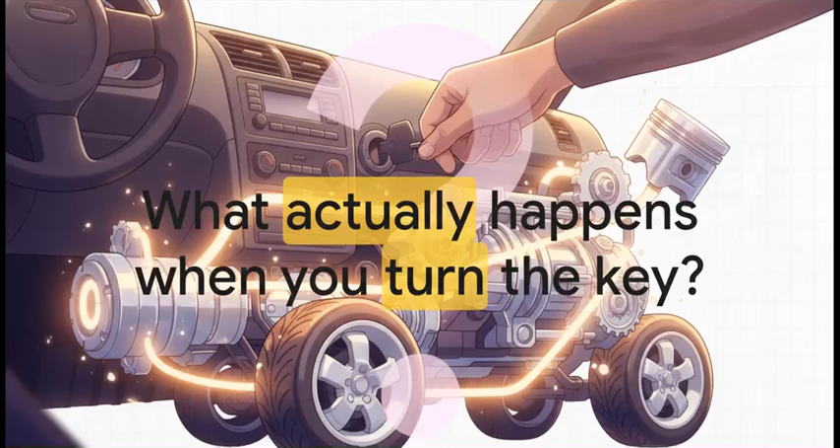I want you to picture yourself just sitting right there in the driver's seat. You slide the key into the ignition, you give it a tiny twist with your wrist, and you hear that familiar rumble. But what invisible dominoes did you just knock over? How does that small, effortless twist of your fingers magically wake up thousands of pounds of resting metal, glass, and rubber? Well, here is our roadmap for today's journey of power.

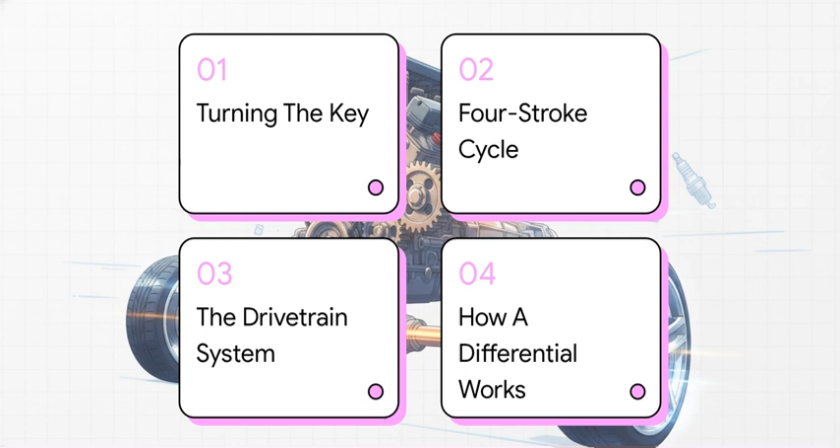We're going to cover 1. Turning the key, 2. The 4-stroke cycle, 3. The drivetrain system, and 4. How a differential works. Let's get going.

Starting right at the top with Section 1, turning the key and the spark that starts it all. You see, the key is essentially just a simple electrical switch talking to your car's computer. When you slide it in and give it that first click, accessory mode, the engine control unit, or ECU, basically wakes up from its sleep. That's when your radio and cabin lights might pop on.

Turn it to the second click, the on mode, and things get serious behind the scenes. The fuel pump whirs to life, priming the fuel lines with intense pressure, and the spark plugs, they go live, just waiting for their moment.

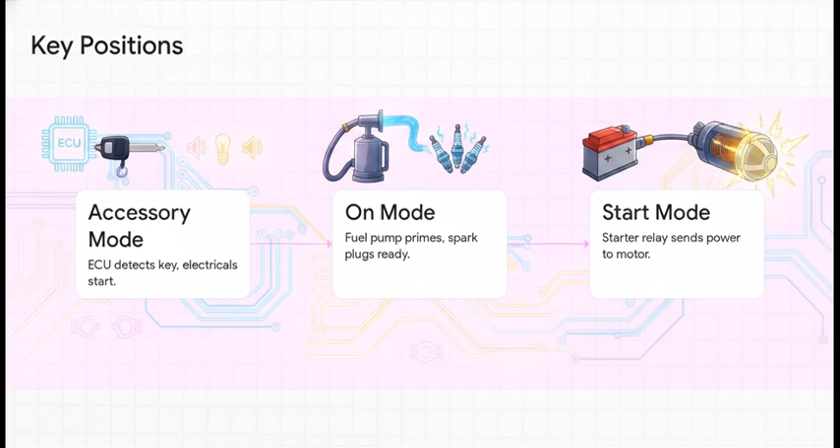Finally, you push the key all the way into start mode against that spring tension. This tells the ECU to engage the starter relay, which then sends a massive, heavy surge of battery power directly down to the starter motor. And this right here is the exact moment electricity becomes physical motion.

That starter motor uses the electrical surge to physically swing a small pinion gear outward, meshing its teeth tightly with a massive gear attached to the engine's crankshaft. Now, because the engine is completely dead and resting at this point, it takes a tremendous amount of torque to get it going.

The starter motor literally forces the heavy, dormant engine to start spinning. It's wild, just a tiny jolt of electrical energy triggering a massive mechanical reaction to finally wake the sleeping beast under the hood.

Which brings us to Section 2, the 4-stroke cycle, or creating the power. Once that starter motor gets things spinning, the engine has to take over.

By definition, most cars out on the road today use a 4-stroke engine. This is an internal combustion engine where a piston completes 4 completely separate movements, or strokes, up and down a hollow cylinder, turning the heavy metal crankshaft along with it. Think of it this way.

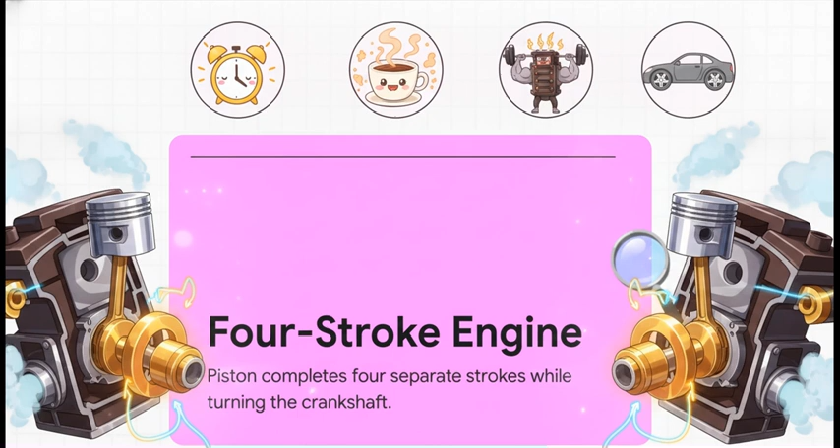If the starter motor was your blaring alarm clock, this 4-stroke cycle is the engine finally grabbing its morning coffee, getting out of bed, and doing the hard work itself.

Let's actually break down the exact sequence of this mechanical heartbeat. First up, intake. The piston drops down in the cylinder, creating a vacuum that sucks in a very precise, misted mixture of air and fuel. Next, compression. The intake valves close and the piston comes back up, squeezing that mixture incredibly tight. The pressure in there just skyrockets.

Then, the magic moment. Combustion. The spark plug fires, igniting that highly pressurized fuel. This violent explosion, this is the exact origin of your car's forward power, violently shoving the piston back down the cylinder with tremendous force. Finally, exhaust.

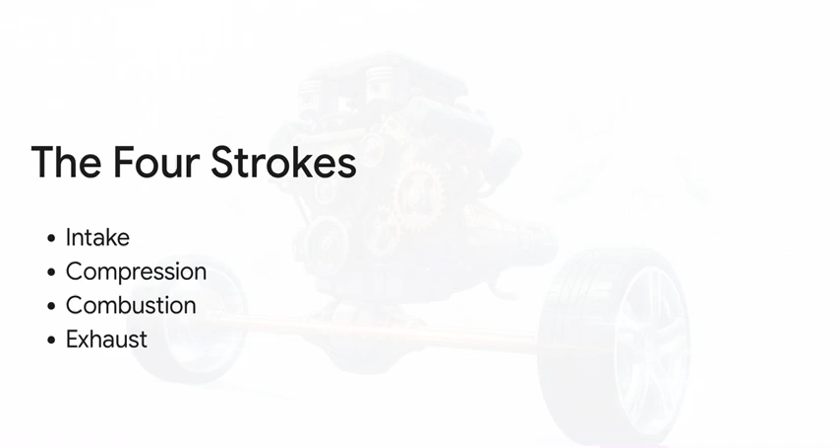The piston rises one last time. An exhaust valve opens, and it pushes all those spent gases right out to the tailpipe. Squeeze, bang, blow. Over and over again, thousands of times a minute, across 4, 6, or 8 different cylinders in perfect harmony. Okay, let's move on and see how this builds in Section 3, the drivetrain system, moving the power.

Now, before we go any further down the vehicle, we absolutely have to clear up a super common misconception you'll hear at dealerships all the time. People use the terms powertrain and drivetrain like they mean the exact same thing, but structurally, they are very different.

The powertrain is the whole shebang, the engine actually making the power plus the entire system transferring it. The drivetrain, however, strictly excludes the engine.

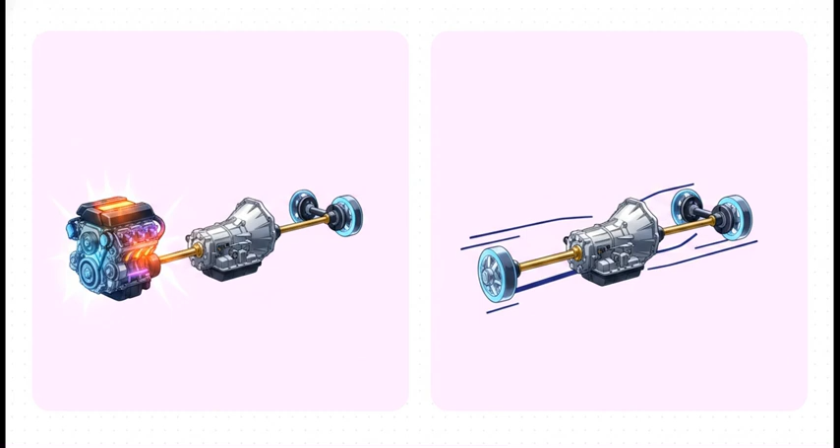It is purely the group of components, the transmission, the driveshafts, the axles, that carry the rotational force away from the engine to the wheels. And the specific parts of that drivetrain totally change depending on the exact type of vehicle you drive. A manual transmission relies on a heavy flywheel and a physical friction clutch that you control directly with your left foot.

An automatic transmission uses a brilliant fluid-filled casing called a torque converter to do that exact same job without any input from you. A front-wheel drive car compacts all of this into a single unit called a transaxle right between the front wheels.

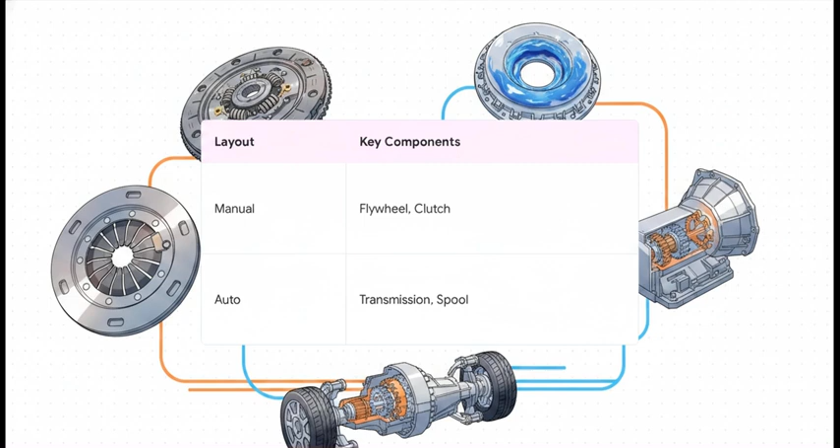But regardless of the specific parts, the ultimate goal is exactly the same. You're taking the wildly fast rotational speed of the engine, which is way too fast for the wheels to handle directly, and using heavy-duty gear ratios to step it down to a usable, manageable speed for driving.

If you're in a standard rear-wheel drive car, this means running a long, heavily balanced metal propeller shaft down the entire length of the chassis. It is a massive physical and engineering feat when you really stop to think about it.

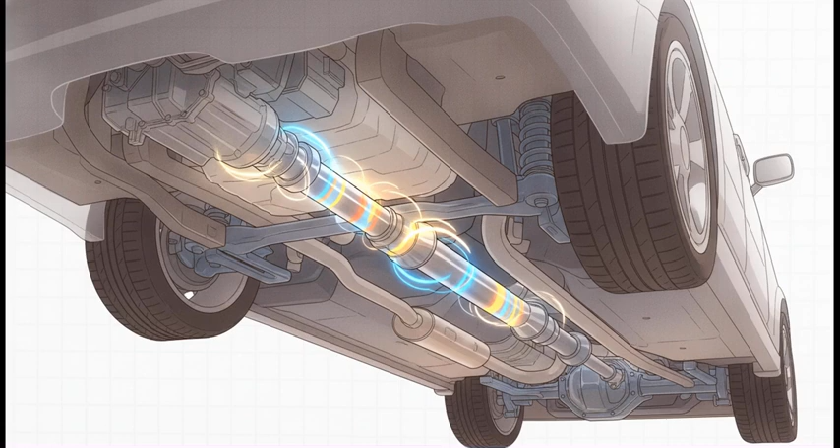You're taking thousands of tiny contained explosions at the front bumper, turning them into sheer rotational force, and sending that immense force down a heavy metal rod spinning thousands of times per minute just to push a 2-ton metal box down the highway smoothly, quietly, and efficiently.

Which leads us to our final stop. Section 4: How a differential works. Solving the turning problem. Here's a major physical conflict we hit at the very end of our power journey. What happens when this heavy metal box actually needs to turn a corner?

Think about the basic geometry of a turning car. The wheel on the inside of the turn is carving a very tight, short circle, but the wheel on the outside of the turn is carving a much wider, longer circle. Here is the massive physical problem.

Both wheels are attached to the same car, so they arrive at the destination at the exact same time. If the left and right wheels were locked together on a single solid axle, spinning at the exact same speed, the car would aggressively hop, skip, and slide around every single corner. The tires would constantly scrub the pavement. Smooth turning at high speeds would be physically impossible without snapping an axle or shredding your rubber.

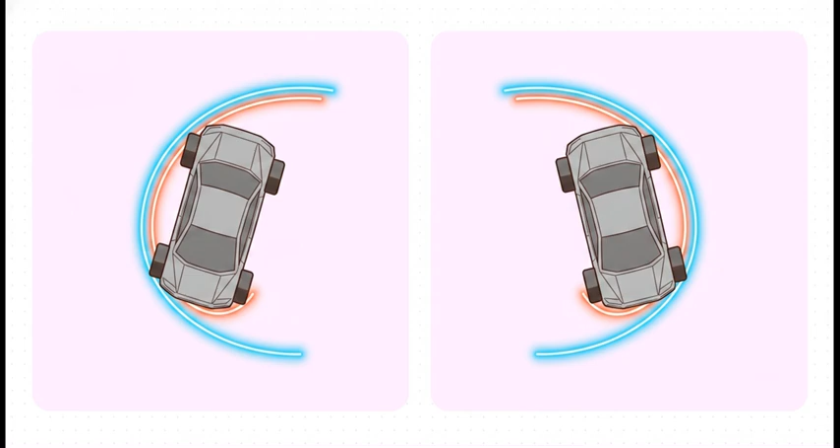So the crucial point is this: to make a turn without slipping or breaking components, the outside wheel absolutely must spin faster than the inside wheel, period. We need a mechanical component that can take the solid rotational power coming from the transmission and somehow split it dynamically and unevenly between the left and right wheels whenever the car turns.

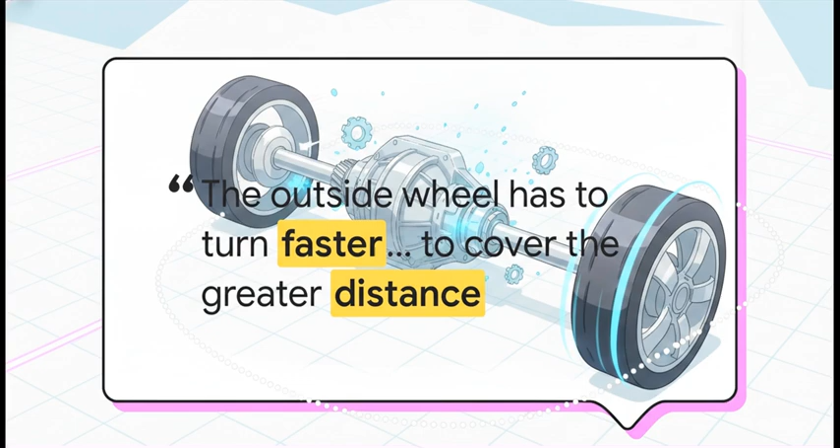Enter the differential. To solve this deeply complex geometric physics problem, modern automotive engineers rely on an invention that dates back, get this, to the 3rd century AD. No way, right? The differential gearing mechanism was originally invented in ancient China for a device called the south-pointing chariot, which was essentially a mechanical compass vehicle. This was centuries before the very first automobile was ever even conceptualized, yet its elegant, ingenious design is still bolted to the underside of almost every single car on the road today.

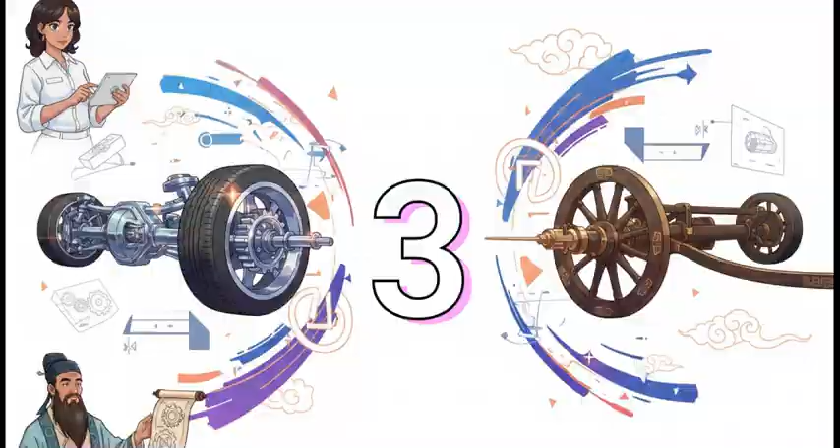Inside the heavy metal housing of the differential, there is an incredibly elegant geometry of gears. Let's trace it out. When you drive straight, a large crown gear spins the left and right axles at the exact same speed. Everything is locked in harmony. But the second you turn the steering wheel, these brilliant little inner gears, called planet pinions, begin to rotate and spin around central sun gears.

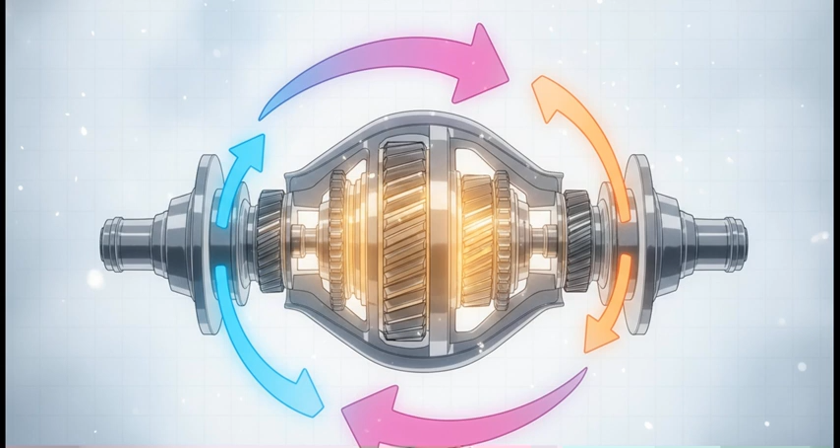This purely mechanical action allows the incoming rotational speed to be dynamically and unevenly shared between the two wheels, letting the outside wheel speed up while the inside wheel slows down. Furthermore, the differential takes the rotational motion of the driveshaft, which runs parallel down the length of the car, and seamlessly turns it 90 degrees, so it runs perpendicular right out to the wheels.

And if that sheer mechanical ingenuity wasn't impressive enough, consider this number: 97. Even with the power traveling all the way from the fiery engine block, through the thick fluid of the transmission, down a spinning steel drive shaft, and through multiple complex gear meshes inside the differential that turn the energy 90 degrees, this entire mechanical system operates at a staggering 94 to 97% efficiency. Only 3 to 6% of the engine's hard-earned power is lost to mechanical friction along that massive journey. It is an absolute triumph of lubrication and precision machining.

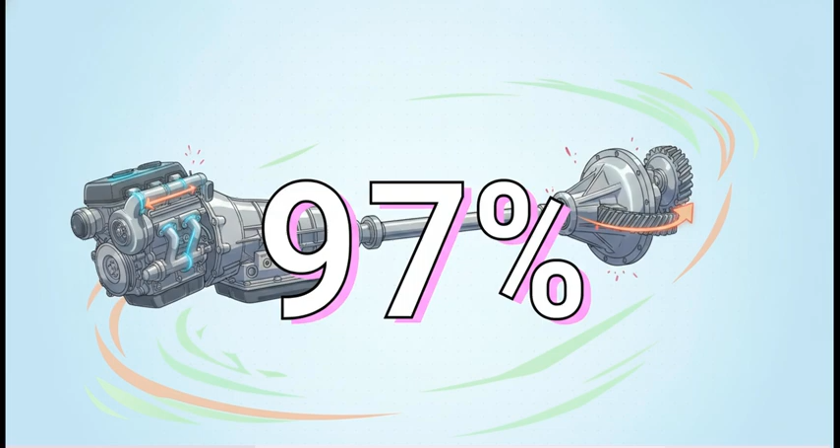It really is a symphony of mechanics, isn't it? From the simple twist of a key acting as a tiny electrical switch, to the violent 4-stroke combustion cycle, down the long, heavy spine of the drivetrain, and finally through ancient 3rd century geometry to make you turn a corner perfectly without a sound. Next time you sit in the driver's seat and hit the gas pedal, will you take a second to feel those thousands of synchronized explosions and brilliant mechanical rotations happening right under your feet?